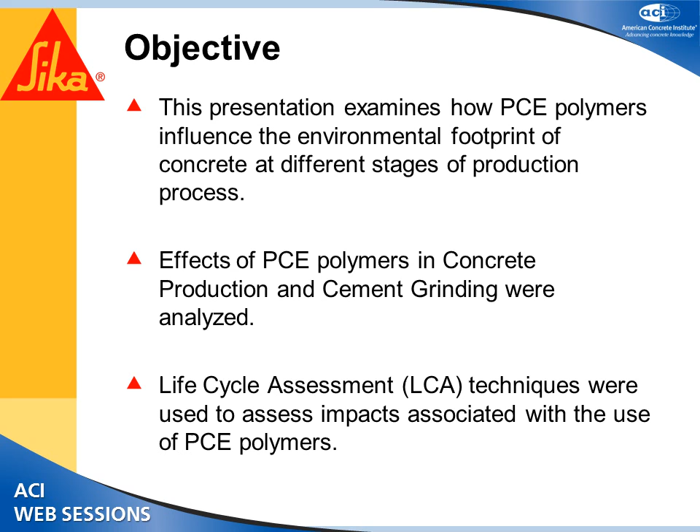The contents of this presentation are, before jumping on to the contribution of PCE polymers, I just want to mention something about the importance of concrete admixtures in concrete as far as sustainability is concerned, then go on to something related to cement and concrete industry, then go on to the life cycle assessment, and then talk about the influence of PCEs on concrete production or concrete mix design, and then on grinding aids and conclusion.

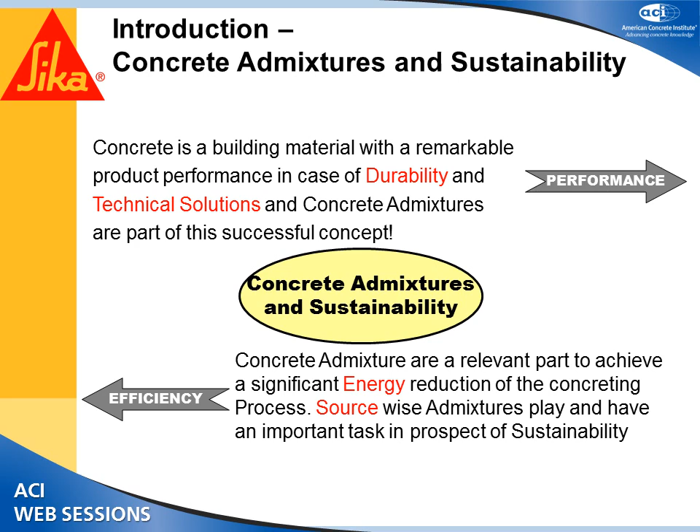As we know, concrete is a very durable material if made right. As compared to other building construction materials such as wood or steel, if you consider the cost and benefit ratio, cost performance ratio, concrete possesses several advantages over other building construction materials. And chemical admixtures contribute a lot to that. Admixtures significantly reduce the energy consumption during the concreting process, and also, resource-wise, admixtures play an important role in the prospect of sustainability.

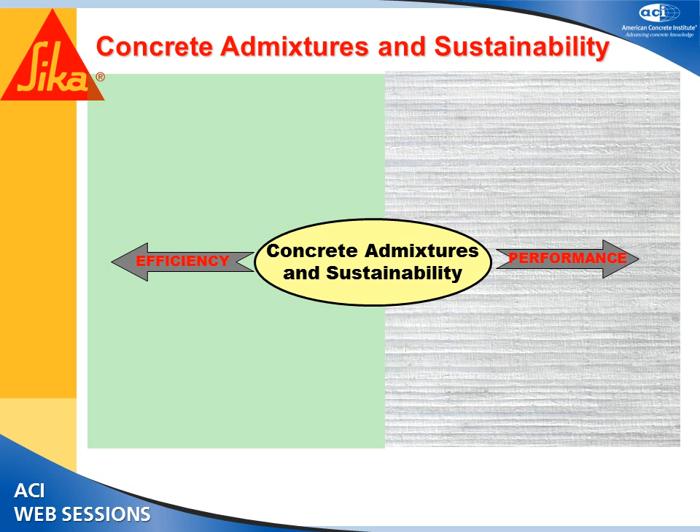So if you look at concrete admixtures and sustainability from the performance viewpoint and the efficiency viewpoint, concrete admixtures significantly influence the durability of the concrete. And how they do that is, they are able to reduce the porosity of the concrete by using high-range water-reducing admixtures. You can improve the freeze-thaw durability and scaling resistance of concrete using air-entraining admixtures. You can use shrinkage-reducing admixtures to minimize shrinkage, corrosion-inhibiting admixtures, and many other types of admixtures to improve the durability of

the concrete. In terms of technical solutions, concrete compared to other building materials, as I had mentioned, performs much better in many aspects, such as cost and performance, and admixtures play an important role in that. So whenever you're comparing concrete with other materials like steel, or in case of pavement, you're comparing with asphalt, with admixtures it's possible to make concrete that is much more sustainable if you consider the overall life cycle of the product.

If you think about efficiency, using chemical admixtures, you can use recycled concrete aggregates. As you know, recycled concrete aggregates have high water absorption, which will need higher water. You can compensate for that higher water using high-range water-reducing admixtures. Safe ingredients: admixtures that are usually available are safe to use, easy to handle and manage, and do not pose any direct threat to humans. And if you talk about energy conservation, you can optimize your concrete mix design by optimizing the cement content of the mix, and hence contribute to reducing the carbon footprint of the concrete.

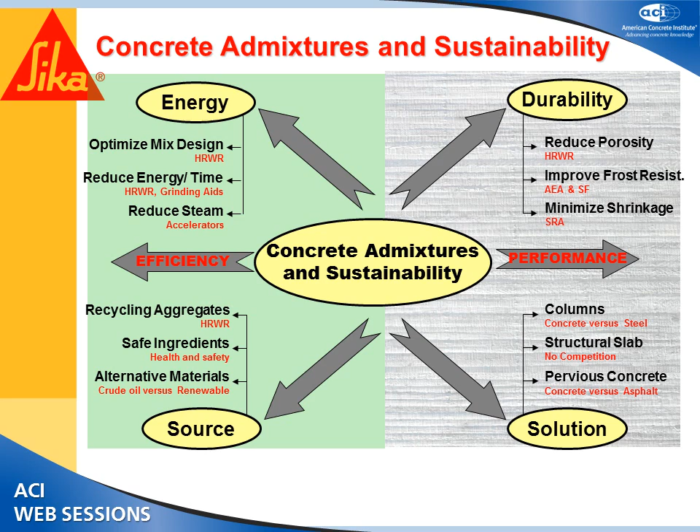And you can reduce the energy and time. If you're making SCC kind of concrete, you don't require any vibration. Or if you're talking about grinding aids, you're talking about reducing energy and also increasing production. If you're talking about use of accelerators, you can reduce steam curing or hot curing. And so these are the ways admixtures usually contribute to the sustainability of concrete.

Moving on to the cement and concrete industry. As you can see over here, during cement production, in the limestone calcination reaction, 100 kilos of calcium carbonate gives you 56 kgs of calcium oxide and 44 kgs of carbon dioxide, which would be 440 kgs of carbon dioxide per ton of cement. And if you add the other emissions of carbon dioxide from the fuels and related to the electricity and other processes, the total carbon dioxide produced per ton of cement is around 850 kilograms.

The production of cement worldwide in 2010 was 3.3 billion tons, which would mean that if I consider this number, which can be different depending on which source you refer to, it will be close to 2.8 billion tons of carbon dioxide emissions, which is a very, very high number. So how do we reduce that number?

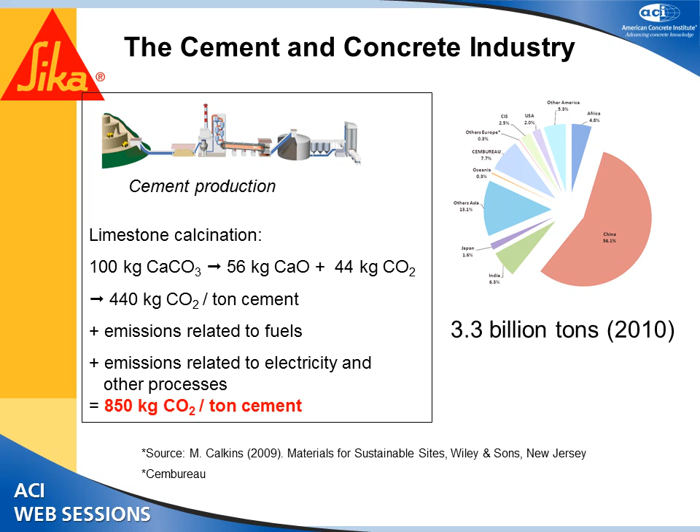As per the World Business Council for Sustainable Development and the International Energy Agency, they have developed a roadmap for the cement industry on how to lower the carbon footprint of their product. They have devised a roadmap such that by the year 2050, they will reduce the carbon footprint of cement by 18%, or really reduce it by half. And the four main ways they have found to do this are energy efficiency in production processes, alternative fuel, clinker substitution by SCMs, and carbon capture and storage.

And if you extend this from cement to concrete, then you can optimize your concrete mix design and also contribute to sustainability. So in this presentation, I'm going to focus on how you can optimize the energy efficiency in the grinding process and at the concrete production level in the mix design using PCE-based admixtures.

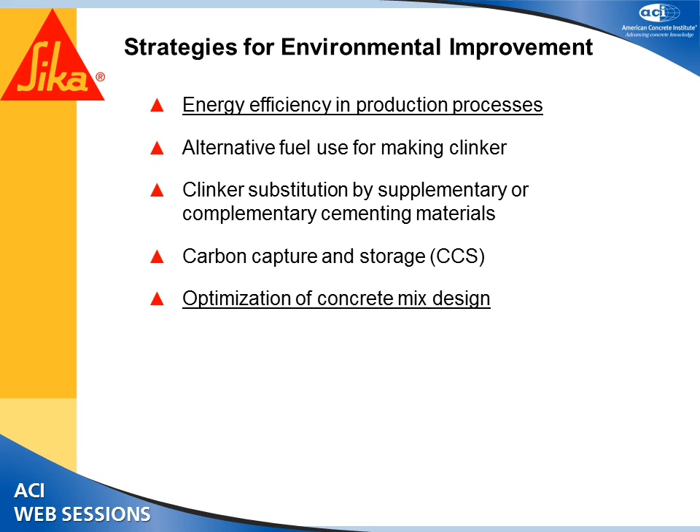For that, to find in this study how everything gets impacted by the use of different admixtures and different components, you have to do life cycle assessment. What is the meaning of life cycle assessment? LCA is a method to quantify and evaluate potential environmental impacts throughout the product's life cycle. So basically, if I can make something in 5 different processes, when you run an LCA on these 5 different processes, at the end of the day, you can come to know what the contribution of each process is to the environment. And then, after considering which process is contributing more and which is contributing less, and considering the economy, I can decide which process to select. So LCA allows us to do that.

LCAs provide comprehensiveness in 2 respects. First of all, it takes into account all the relevant life cycle aspects of a product, right from the extraction of the raw materials to the shipping, the formulating and the distribution of the materials, to the end of the product's life cycle. And it also analyzes the different environmental impact categories. I'll mention what these are in a minute.

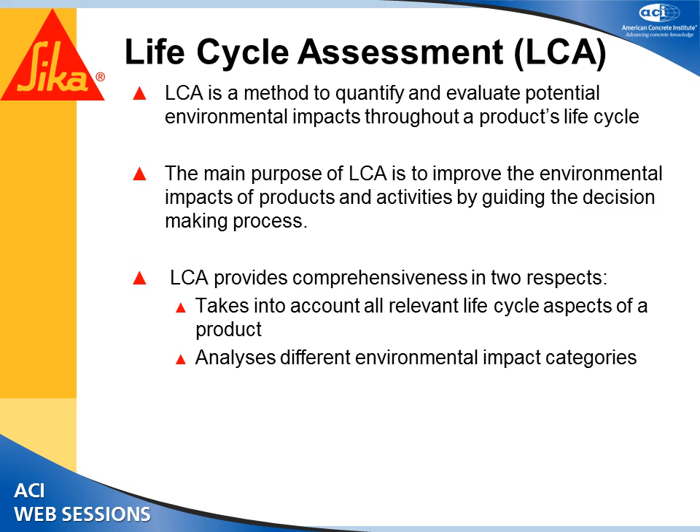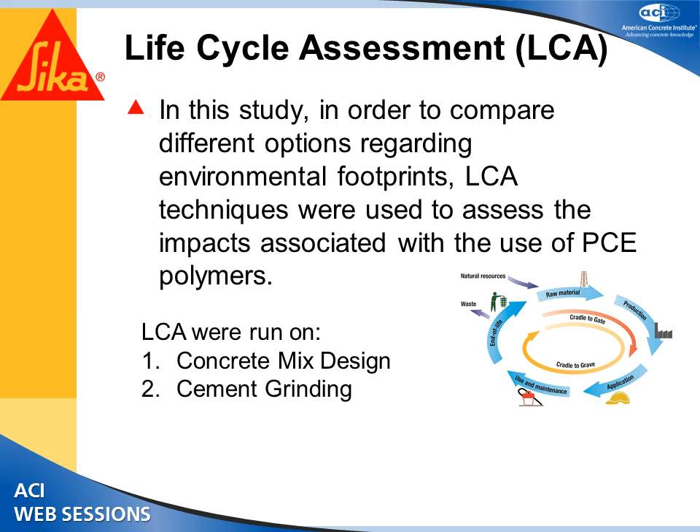In this study, LCA techniques were used to assess the impact associated with the use of PCE polymers. The LCAs were run on concrete mix design and on cement grinding. The LCA method used in this study was a software called GaBi, G-A-B-I. This LCA was performed by our corporate sustainability group in Europe. The GaBi software is very popular because it has a very wide database, and a lot of the database information is also from the industry, so it is more relevant. The data sets for modeling were retrieved from the commercial databases, the European Reference Life Cycle Database and the EcoInvent.

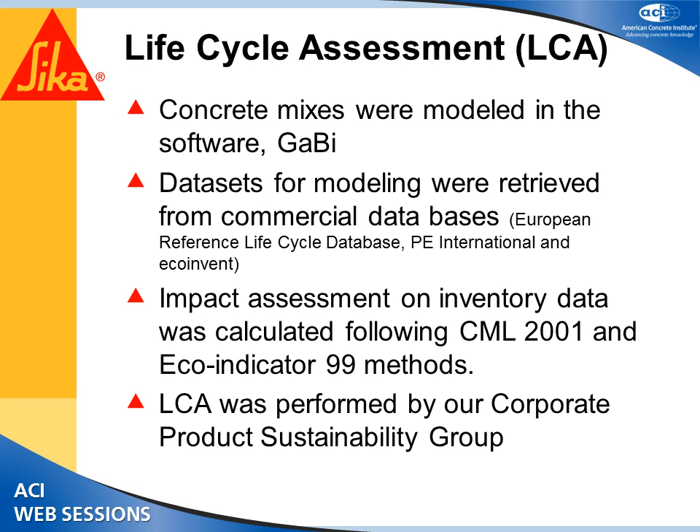Impact assessment on the inventory data was performed using 2 methods. One is CML 2001 and one is the Eco-indicator 99 method. These are basically methods which will tell you, if you follow this process, what contributions you are going to make. And I will mention in brief what the methods are.

So not to confuse you with all these terms, but in the CML 2001 method, there were 8 categories that were studied and assessed. The first is abiotic depletion. So as not to confuse everyone, I've highlighted the main words in red over here. The abiotic depletion potential means the reduction in non-renewable resources. So if I have 2 processes and one process is reducing my non-renewable resources a lot, which means that process is probably not good.

And you can do the same comparison for different categories. One is the acidification potential, which is basically acidification of soil, which will reduce the pH and can damage the ecosystem. So if you have two processes and one has a higher number than the other, that's not supposed to be good. Next one is eutrophication potential.

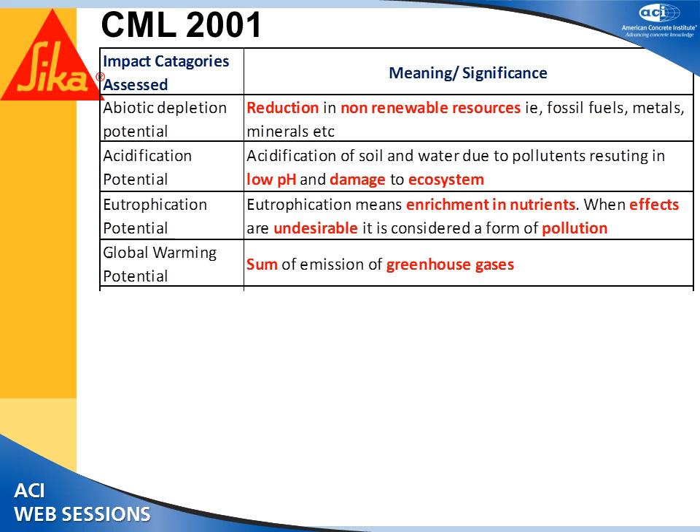It basically means enrichment in nutrients, and sometimes enrichment in nutrients of something in an ecosystem is bad for the entire ecosystem. Global warming potential is basically the sum of emissions of greenhouse gases. The next four impact categories are human toxicity potential, that is calculated by addition of releases which are toxic to humans. Ozone depletion potential, it's a relative degradation of the ozone layer.

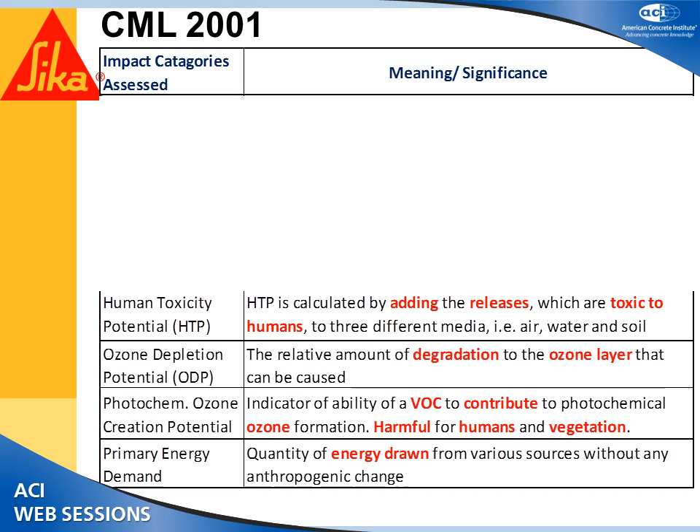Photochemical ozone creation potential is basically an indicator of the ability of VOCs to contribute to ozone formation. Again, it is harmful for humans and vegetation. And the primary energy demand is basically the quantity of energy drawn in that process. So these are all the 8 impact categories that were assessed when the CML 2001 method was used.

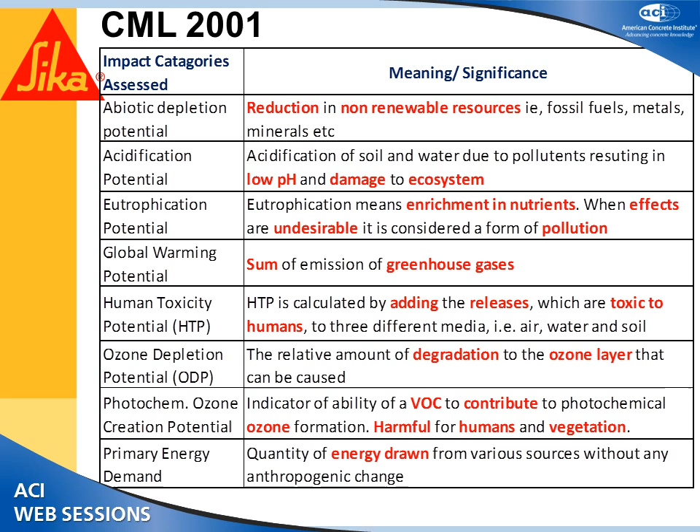So for each of these categories, I will get a number. Then if I am comparing two processes, I will get a number for each of the two processes, and I can see which one is better. The other method was the Eco Indicator 99.

Again, this is something similar to the previous method, but in this method it assesses the damage to mineral and fossil resources, damage to ecosystem quality, and damage to human health, and it gives a weightage to each of these. So it has given 20% weightage to this, 40% weightage to this, and 40% weightage to this, and at the end you get just one single number, with which you can determine which process is better.

So this is a better way than the previous one if you are not experienced, because not all of these carry an equal weightage. Some are more important than others. So in the Eco Indicator 99 method, the weightage is pre-assigned, so you get a final number which is easy to compare.

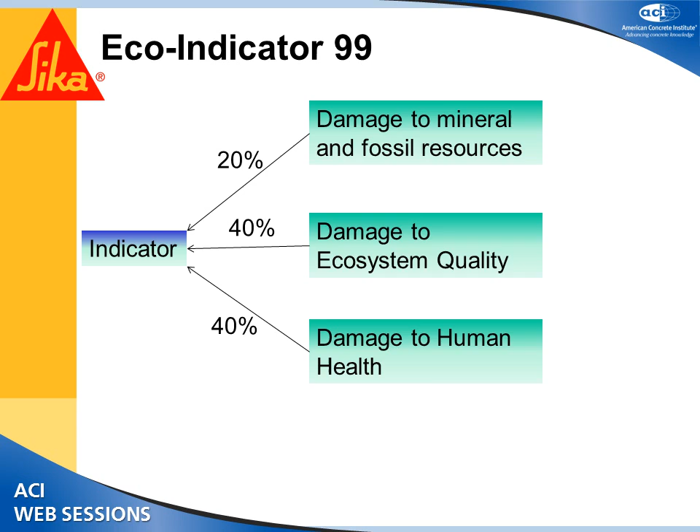And if you want to know the details of that Eco Indicator 99, I'm not going to go through them in the slide, but if you want, later on you can visit the presentation on the website and find out. Basically, if you see, these are 3 methods, and it goes back down to the extraction of the minerals, and it can find out what is the damage to minerals and resources, and similarly for all the other categories.

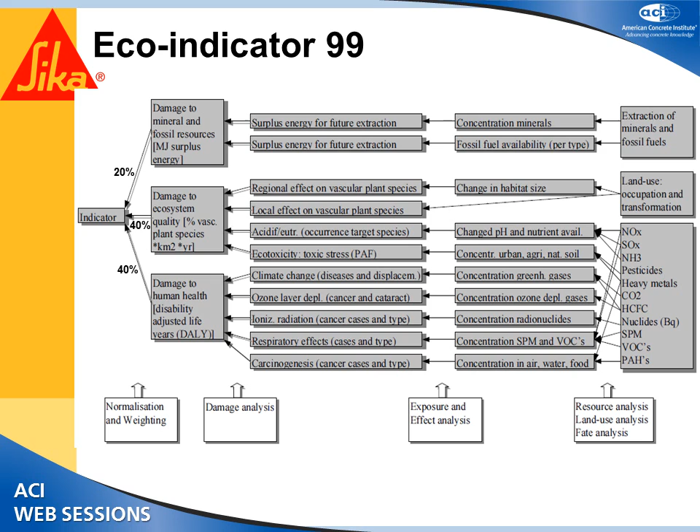So what is the life cycle model for concrete admixtures that was used over here? In this study, the model used was cradle to gate, which means right from the production of raw chemicals, which were transported to the maker of the raw materials, which were transported to the admixture company who formulated the product, and the product was produced. The cost of packaging was added to it, and it gets transported to the production. So this was the LCA for admixtures.

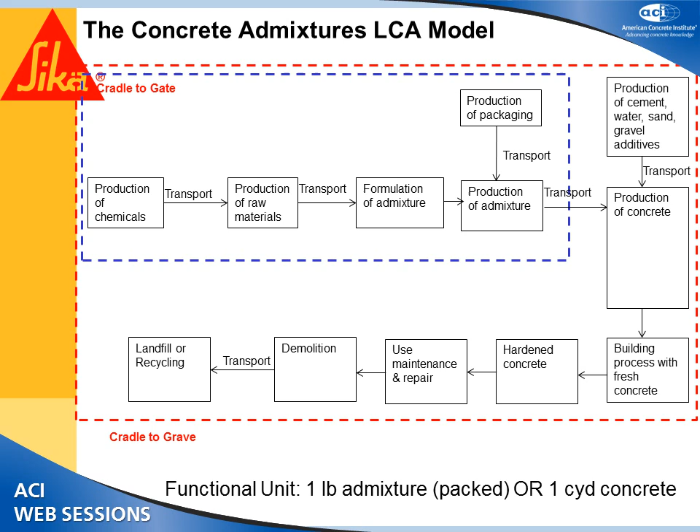Similarly, it can be done for all the other materials such as cement, water, sand, and aggregates. And when you add all that, it goes to the concrete, the concrete is supplied, the building is made, concrete is hardened, it is used, and then at the end of the life cycle it is demolished, and then it either goes to landfill or recycling. That will be the entire life cycle of the concrete, which is the cradle to grave. What we are going to focus on is the cradle to gate for the admixtures over here, because once the admixture gets added to the concrete, its job is done.

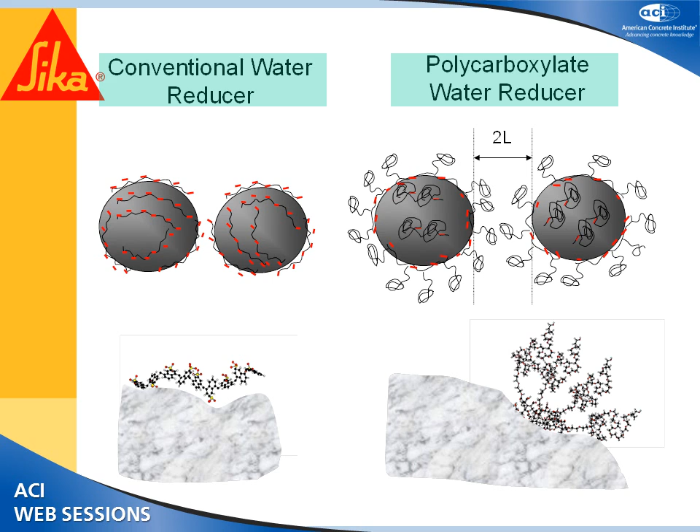I'm not going to stress too much on that because everyone knows that polycarboxylate admixtures perform much better in terms of water reduction as compared to conventional water reducers. In the last decade or so in the US, the majority of high-strength concrete is done with PCE-based admixtures now. So the test setup for this case study was, LCA was conducted on 2 concrete mix designs with the same

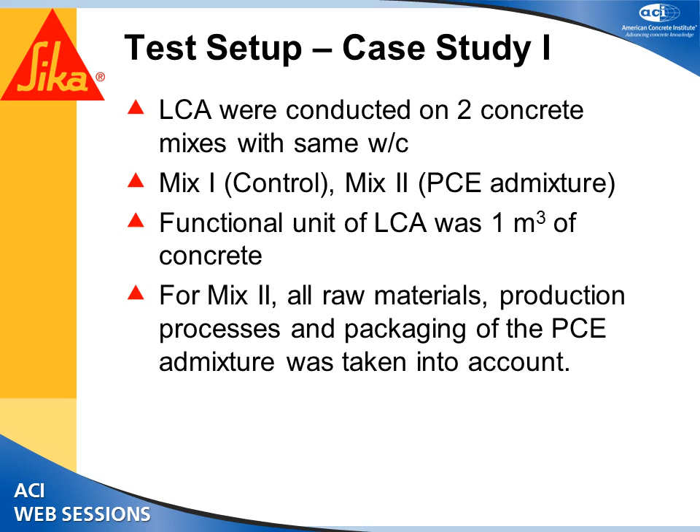water cement ratio. Mix 1 was the control and mix 2 was with PCE admixture. The functional unit was 1 meter cube of concrete, and for mix 2, which had the PCE admixture, all the raw materials used in the admixture, the production processes and the packaging were considered and taken into account. So this was mix design number 1, which has a cement content of 590 pounds of cement and a water cement ratio of 0.52.

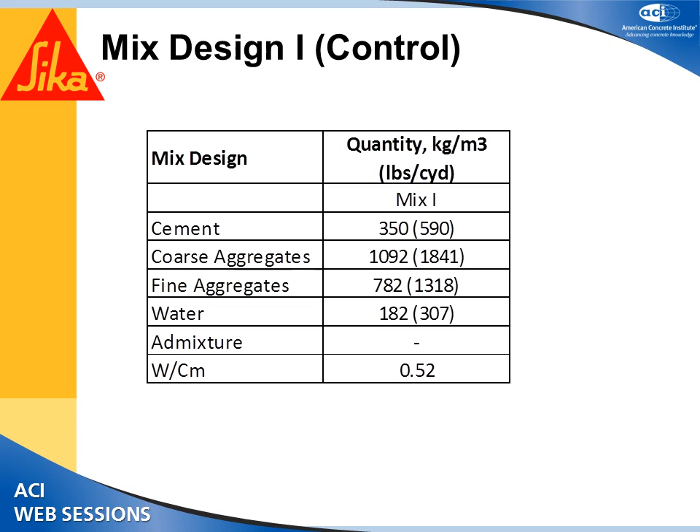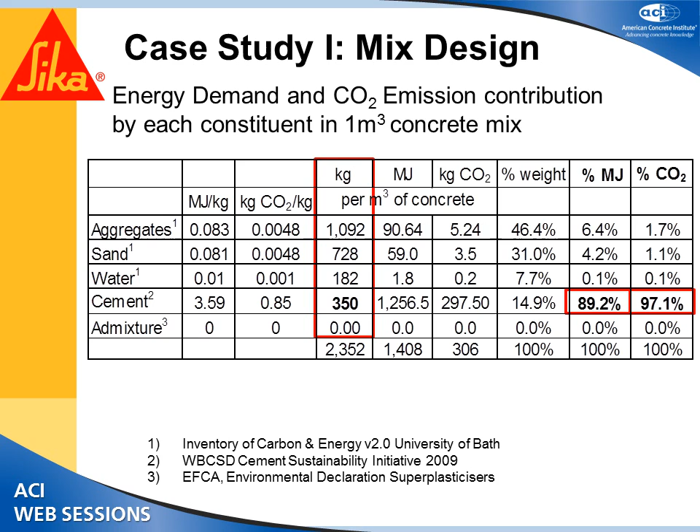For this mix design, it was calculated how much energy was utilized and how much carbon dioxide was emitted for each of the constituents. This is the mix design in kg per meter cube, and these are the ingredients. If you look at the percent energy consumption of all the materials, you can see that it was highest for the cement, and the carbon dioxide emission was also highest for the cement. So if you want to improve the sustainability of the concrete, the thing you have to work on is optimizing the cement. And that's what we did: we selected mix 2, which has a lower cement content as compared to mix 1.

Mix 1 had 590 lbs of cement, mix 2 has 472 lbs of cement, 118 pounds of cement less. The water to cement ratio was the same. The workability was compensated by using a PCE-based admixture. So the workability was the same, the water cement ratio was the same, the only change was in the cement content. And now we run LCA on this mix and LCA on this mix.

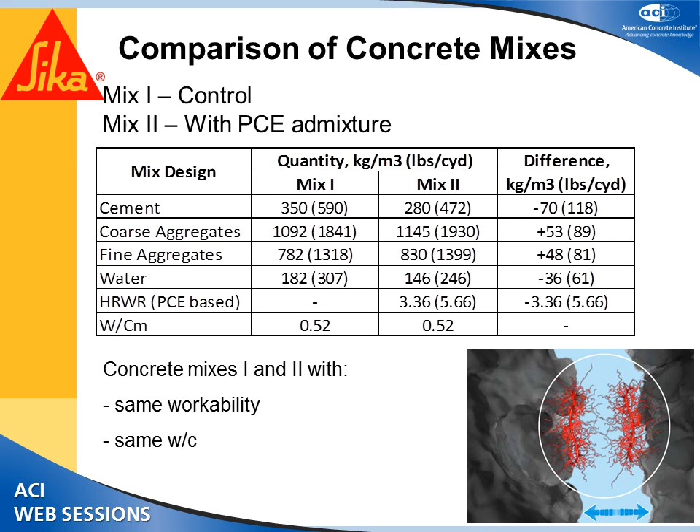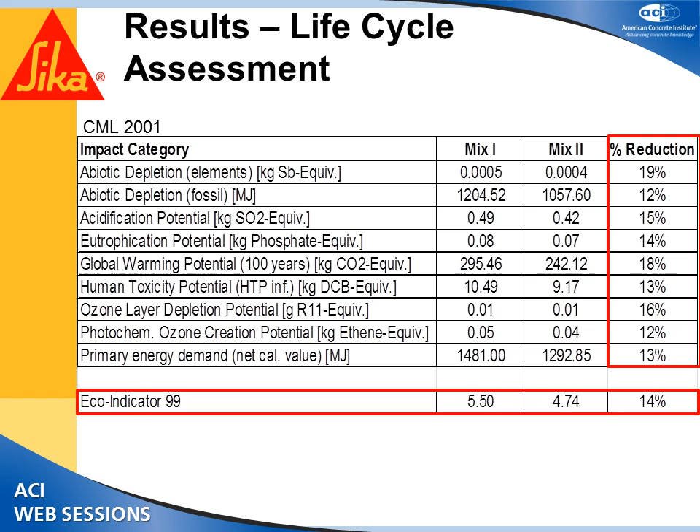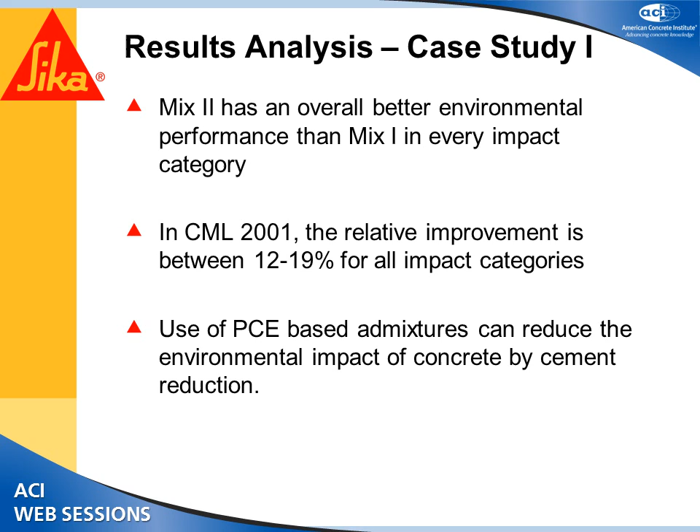Based on this case study, it was found that mix 2 had an overall better environmental performance than mix 1 in every impact category. In CML 2001, the relative improvement is between 12 to 19% in all the impact categories, and the use of PCE admixtures can reduce the environmental impact of concrete by cement reduction. Now someone would say that this was possible also using any other water reducing admixture, not only PCE based. So what is the big thing about the PCE?

So I refer to one case study which was done by a student for his master's thesis at Sika. What he had done is basically he had selected a mix design which had a cement content of 506 and a 0.5 water cement ratio. And he selected 3 different kinds of admixtures of different bases. The first one was lignin based, the second one was melamine naphthalene, and the third one was PCE based. All these 3 admixtures were 40% solid products, and he added them to get the same workability. So the mix design was the same.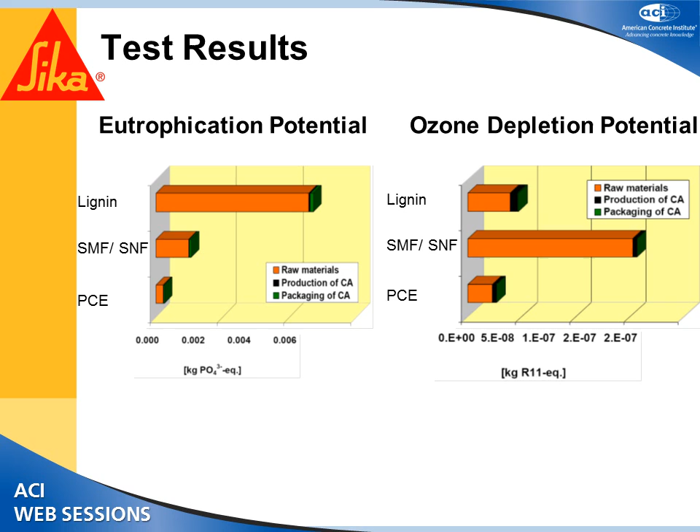Even if you look at the ozone depletion level, the PCEs contribute the lowest. Now I want to point out over here that this was a specific case study which was done at one plant, and it may not be directly applicable everywhere. For the global warming potential, again PCEs perform better than the other technologies.

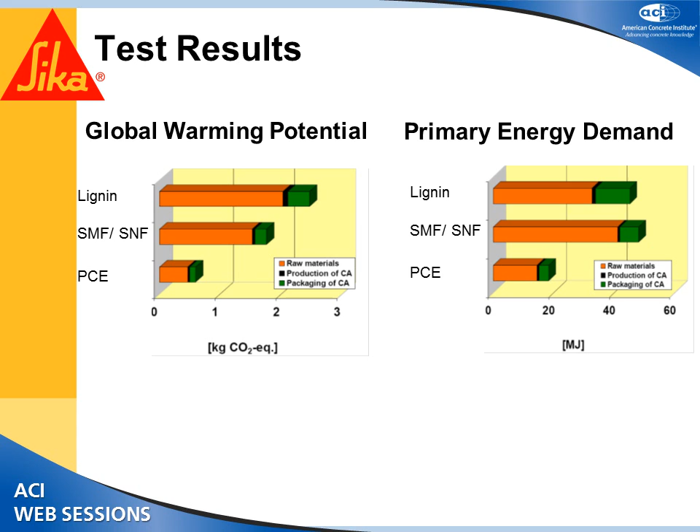Over here you can see even in the green color, the packaging, the PCE is lower as compared to the other, and the reason for that is because PCEs worked at a lower dosage, so you require lesser packing material compared to the other ones. And the primary energy requirement also was significantly lower. So from this case study, it was found that PCE admixtures had a smaller material intensity since a lower amount of material was required, and the environmental impacts of PCEs are significantly lower than the older traditional technologies.

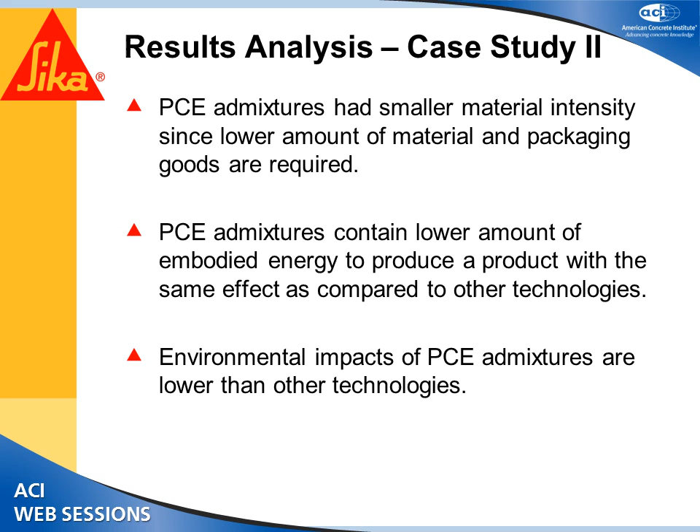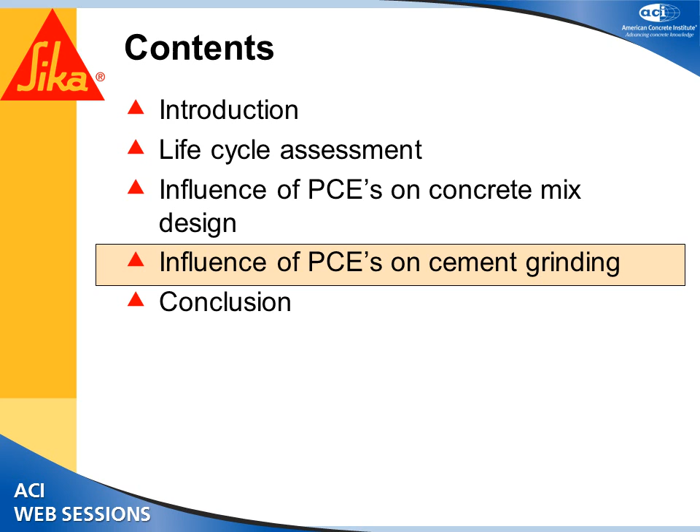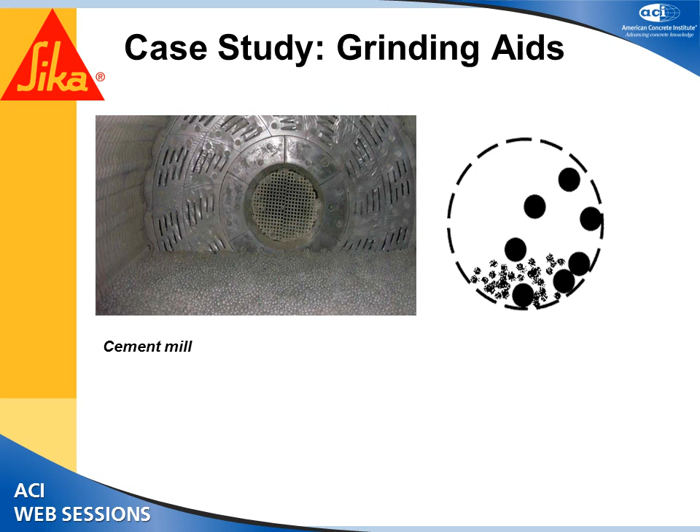Cement manufacture is a highly technical process, and every step in the process has a significant impact on the quality of the product, the economics, and also the ecological production parameters. The cement grinding process is the final chance for the cement producer to do any kind of adjustment in the cement quality so that it can meet all the relevant standards and satisfy the customer requirements.

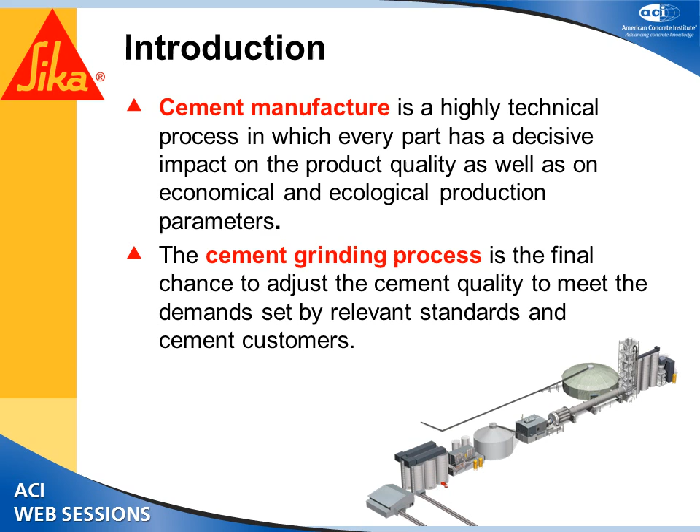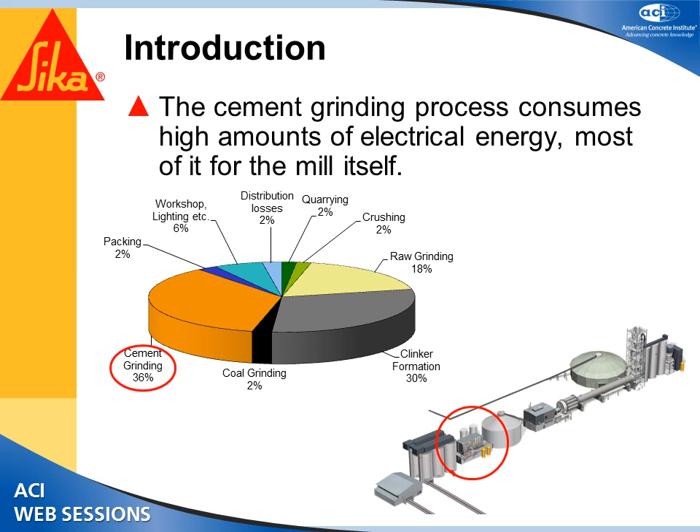And so how do these grinding aids work? In the grinding mill, when the steel balls are impacting the clinker, a crack is formed, but within the crack there are electrostatic charges which attract each other and try to bridge the crack. When they bridge the crack, it now has to be broken again. So that decreases the efficiency of the plant and reduces the production. With the use of grinding aids, whenever the crack is formed, the molecules of the grinding aid enter the crack and attach on the positive sites and prevent the cement particles from coming and joining together. And that's how they increase the efficiency of the grinding process.

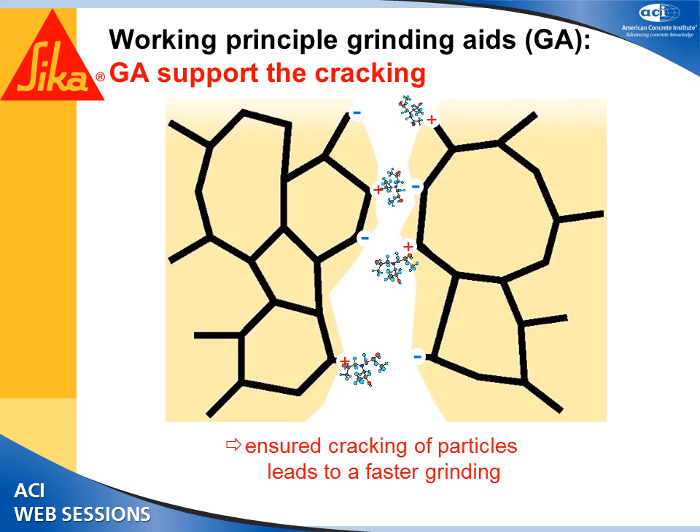The other thing grinding aids do is, because of these electrostatic charges, the cement tends to form a coating on the steel balls, and when that happens, it reduces the impact of the steel balls against each other and also against the clinker particles. So that reduces the efficiency of grinding. Whenever you're using grinding aids, because they repel the cement particles apart, you have less formation of dust on the steel balls, which increases the intensity of grinding, and you get faster production.

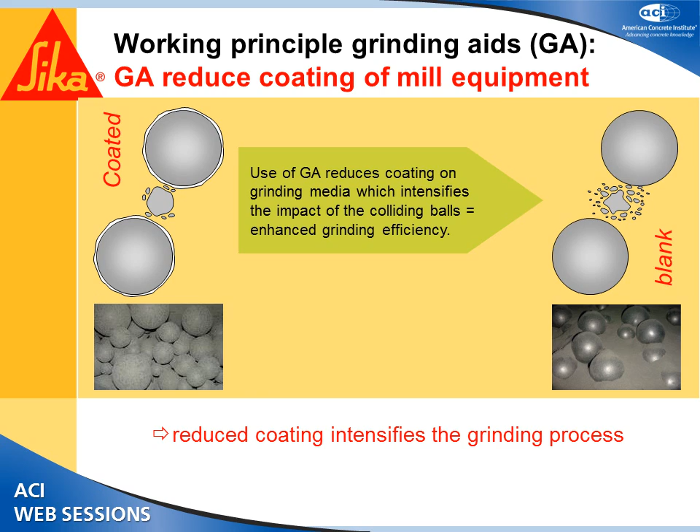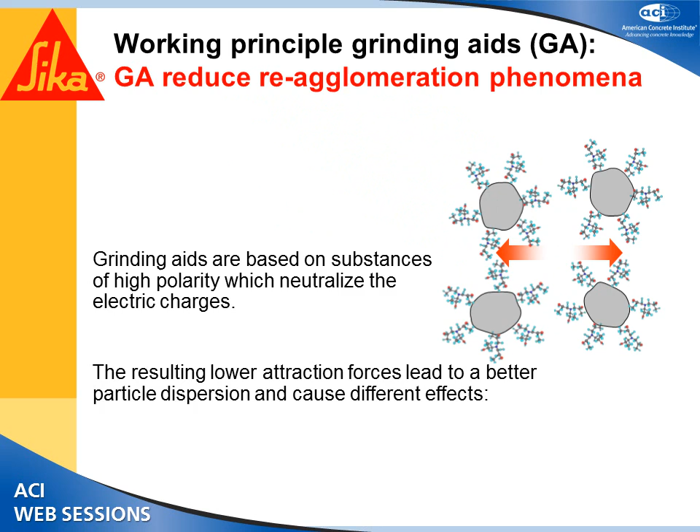The third thing that grinding aids do is, whenever clinker particles are broken, they again have a tendency to form agglomerates or come together. And whenever you are using a grinding aid, it basically disperses those agglomerates. The problem with the formation of agglomerates is when the material is ground and moved to the cement separator, where the cement gets separated, the finer particles go to the bagging area, and the coarser particles again go for grinding.

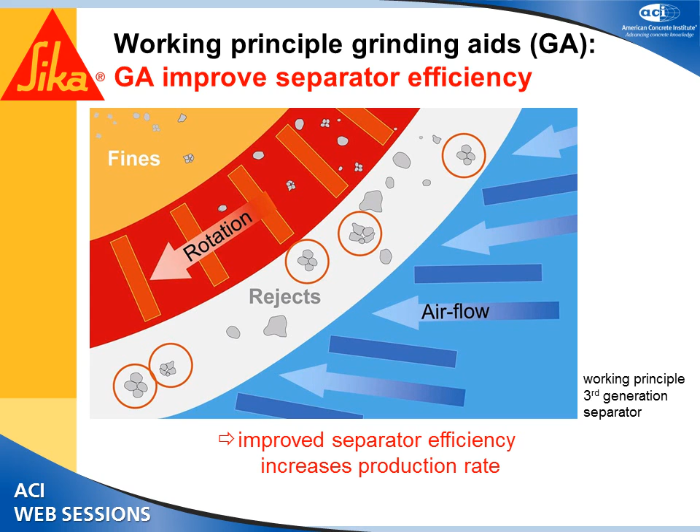If the particles are agglomerates, they get rejected because they are considered as one single particle, which decreases the production efficiency. When you're using a grinding aid, you no longer have the agglomerates, which will increase the production process. So what is the difference between the traditional and PCE powered grinding aids?

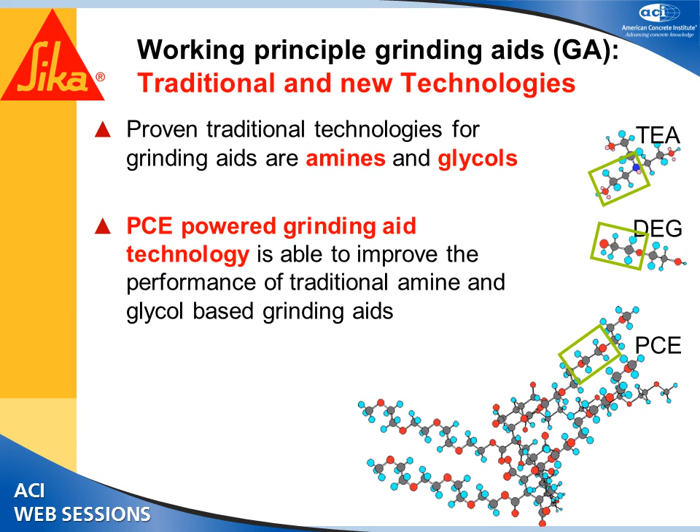The traditional grinding aids are based on amines and glycols. The PCE powered grinding aids are based on PCEs and amines or glycols. I want to make a clear distinction here: the PCEs used for concrete production are maybe pure PCEs, whereas the PCEs used for cement grinding are not pure PCEs, but PCEs combined with conventional technologies. But they significantly influence performance. As you can see, you basically attach PCEs to the traditional technologies and improve their performance.

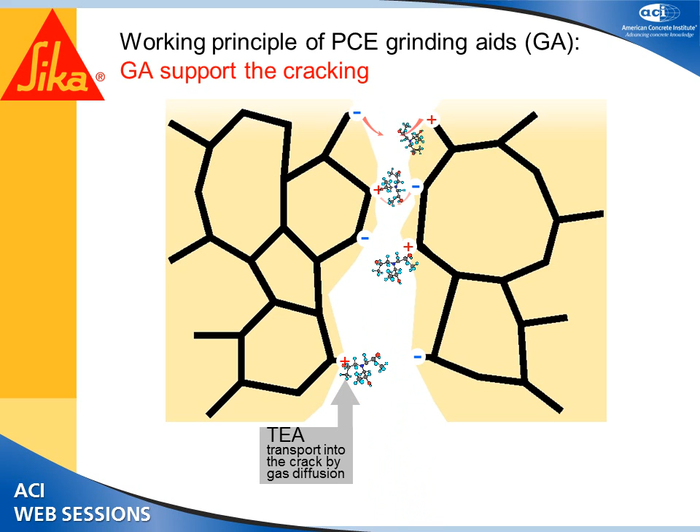So what happens when PCE powered grinding aids are used? In the conventional grinding aid, you have the molecules entering the crack and separating the cement particles. When you are using a PCE based grinding aid, it further enhances the separation, which will give you faster production and more enhanced dispersion.

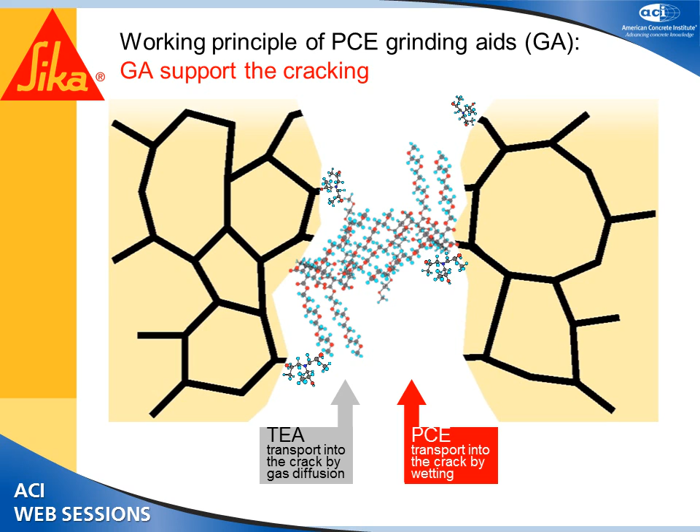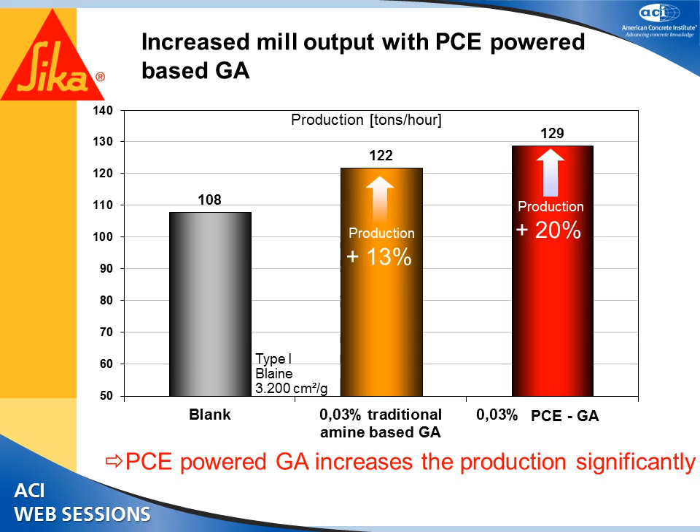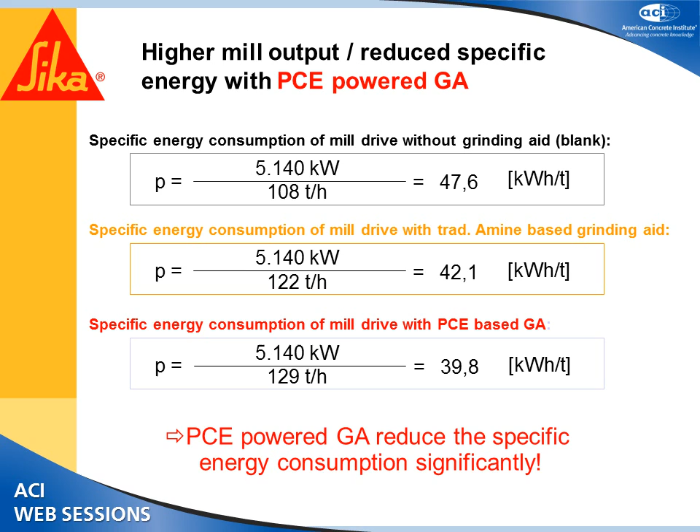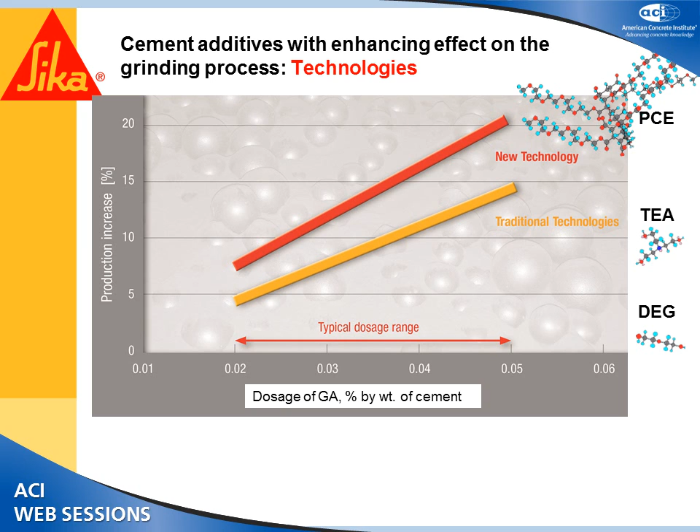With some cements, even if you use the traditional technologies, you can only get a certain performance. Even if you increase the dosage, you can't go beyond. But using PCE based, you can get much higher performance. So the advantages of using PCE grinding aids compared to conventional are maximized mill production, enhanced strength development, improved particle distribution, higher clinker replacement.

Producers generally don't increase the clinker replacement because when they do that, they'll have to grind it more to get the same kind of activation. But using PCEs, because it improves production, you can go for higher replacement levels. Improved powder flowability and bulk density, and sometimes in tailor-made admixtures you can also have improved concrete workability.

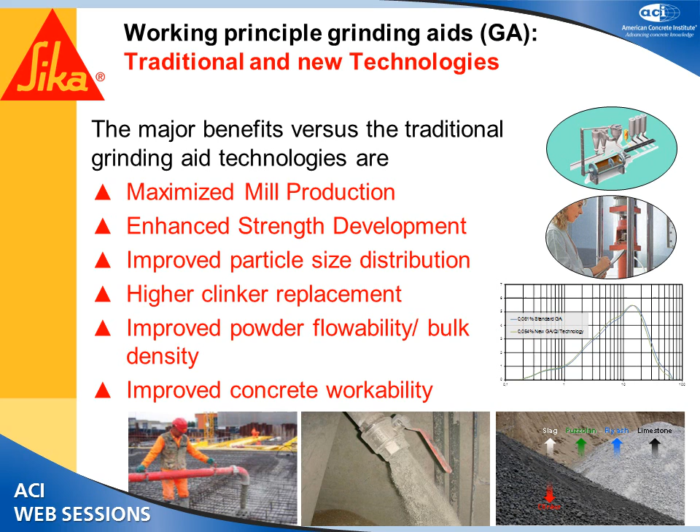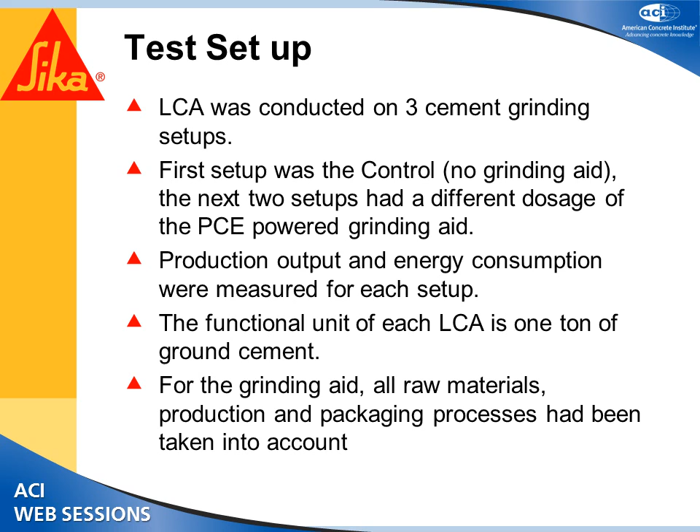So moving on to the test setup for the grinding aids testing, the LCA was performed on 3 setups. One was a control with no grinding aids, and 2 were with grinding aids, one at a lower dosage, one at a higher dosage. The production output and energy consumption were measured for each setup. The functional unit was 1 ton of ground cement. For the grinding aid testing, all the raw materials, production and packaging process were considered. So this was the result.

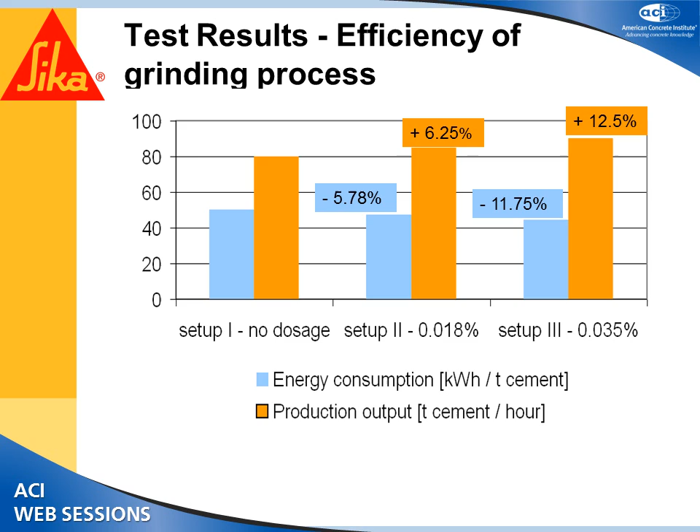Here you have in the blue bar the energy consumption and in the yellow bar the production output. This was when no grinding aid was used. This was when the grinding aid was used. You can see the energy consumption reduced by 5.7% and production increased by 6.25%. And when the dosage of grinding aid was increased from 0.018 to 0.035, you still had increased production and lower energy consumption. When the LCA was run, in this case it was run only with the Eco-indicator 99.

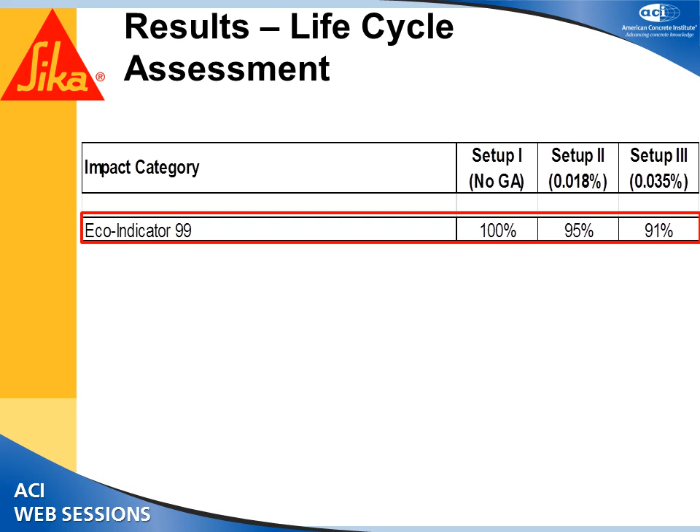For setup 1, which had no grinding aids, if that is considered as 100%, then for setup 2 the result was 95%, and for setup 3 it was 91%. So what you can find out from this is that, considering Eco-indicator 99 results, setup 3, which had the highest dosage of the PCE grinding aid, has the best environmental performance. The PCE-based grinding aid can improve the environmental impact of cement by reducing energy consumption.

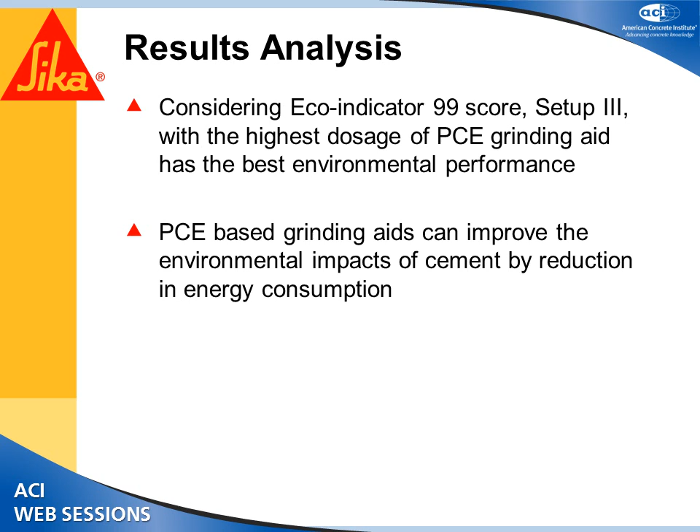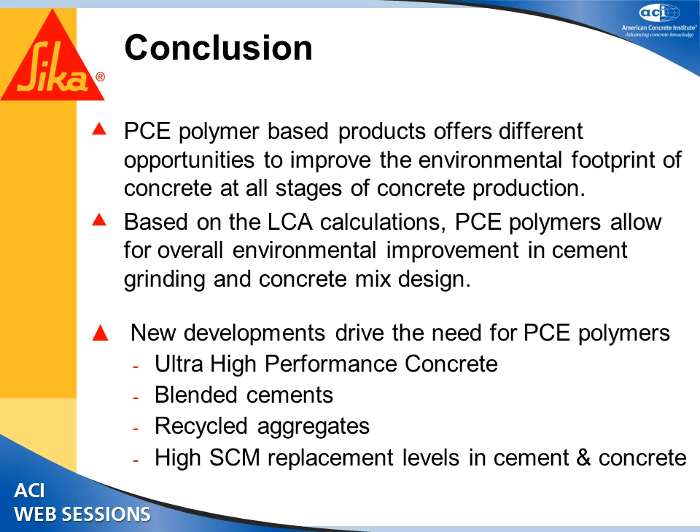In conclusion, all I can say is the PCE polymer-based products offer different opportunities to improve the environmental footprint of concrete at different stages of production. For concrete and cement, based on the LCA calculations, PCE polymers allow for overall improvement in cement grinding and concrete mix design. And for new development, the need for PCEs is based on new requirements of ultra high performance concrete, blended cements, and high SCM replacements using recycled aggregates.